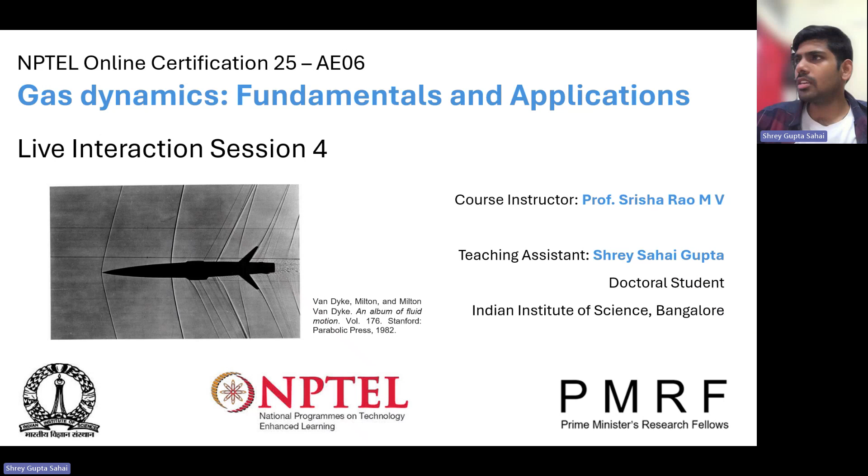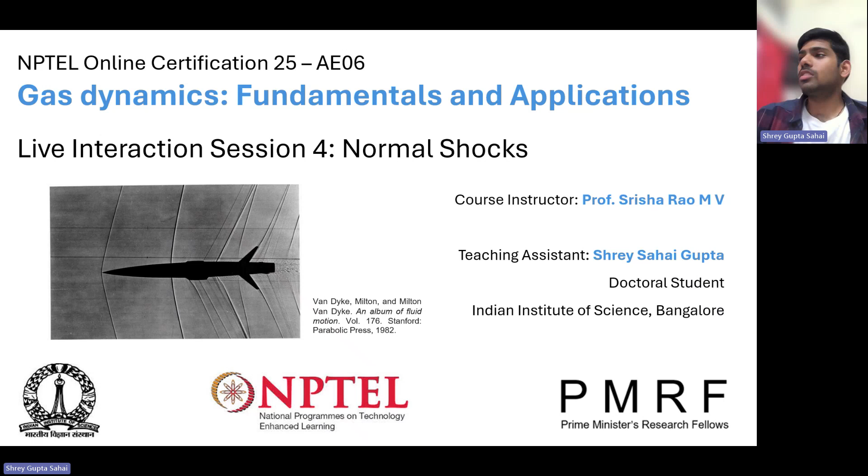The topic for today is going to be normal shocks, and we'll get started with it, for the benefit of people who have not watched the videos for the first three lectures.

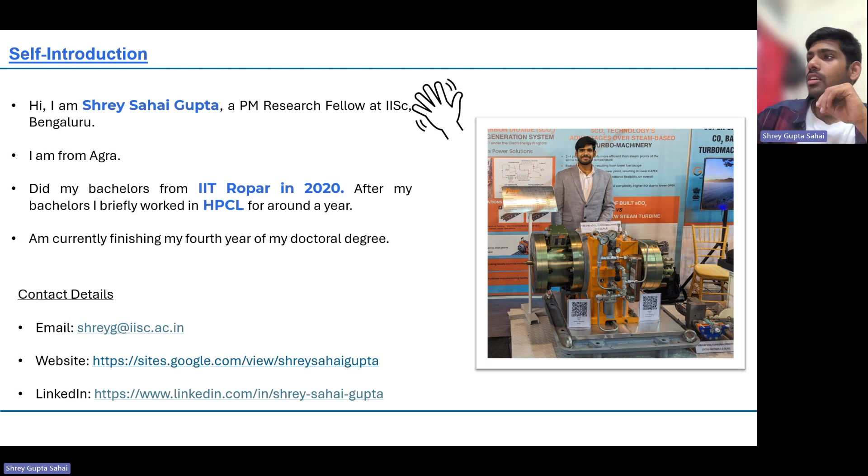Let's get started. A small recap from the previous lecture would be nice, so let's do that. Last time, we've had three lectures up till now.

The first lecture was just a brief overview. In the second lecture, we explored the fact that why high-speed flows imply compressible effects coming in.

In the second live interaction session, as we had nothing much related to gas dynamics as such, we started exploring the power of the integral form of governing equations when we want to calculate average quantities. For example, if we want a cumulative effect of something, we go ahead with our integral equations rather than solving differential equations. That is the idea.

A word of caution there: it's not the power of integral equations and the integral form of equations alone that allows you to simplify a very complicated problem and solve it very easily. There are a lot of simplifying assumptions that we take along the way to make progress. So that is one point.

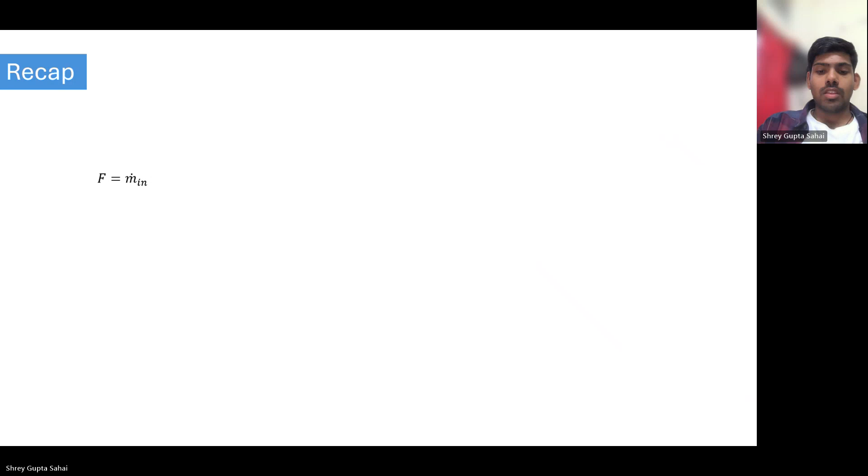Last time we looked at the thrust of a propulsion device, of a jet propulsion device, and we saw that the force is related like this, and there is an additional force term that comes in of this sort.

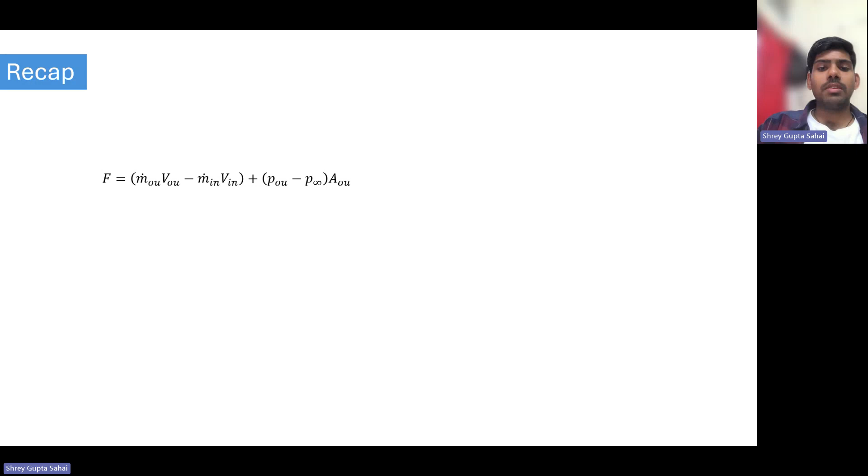Now, in this format, it might not give you the physical significance... oh, someone is joining, so let's.

Hello Pranav, hi, am I audible? Yes, yes. I guess I'm audible, let me know. Yes, yes sir, yeah, great.

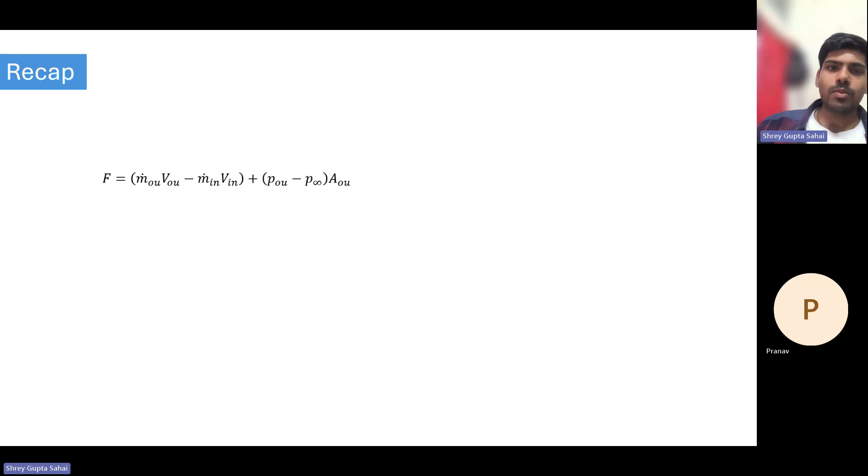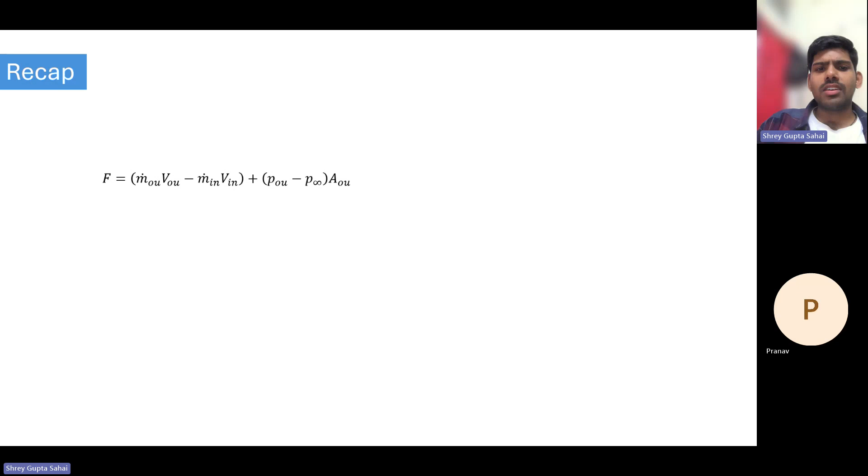I was just going through this recap where we derived the expression for the thrust force on the jet propulsion device. This is something that we saw, and in this form, as we had last discussed, I remember you were there in the last meeting, we discussed in this format. It does not give you a very physical significance of this expression, as there are some cancellations happening.

A more physical, a better expression which gives you a physical significance is the one where those cancellations do not happen, and you see that there's a force due to the pressure on the engine walls, a pressure force on the two walls of the engine, the inlet wall and the outlet wall, and there are side walls as well. That is something we had looked at last time.

We could have solved some problems, but that was all to just demonstrate that integral laws help you solve problems where you need to calculate cumulative effects, right? When you want to know the cumulative effects of something and not the detailed field or detailed variations of some quantity, you want cumulative details, go for the integral form of equations and start solving those equations.

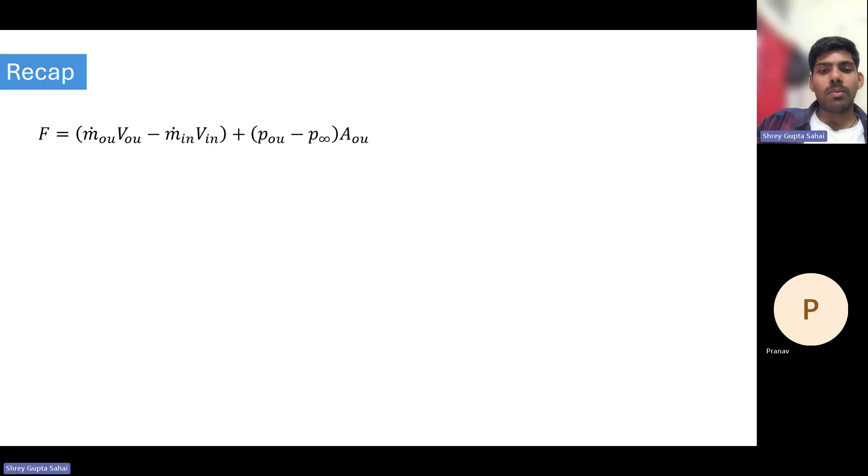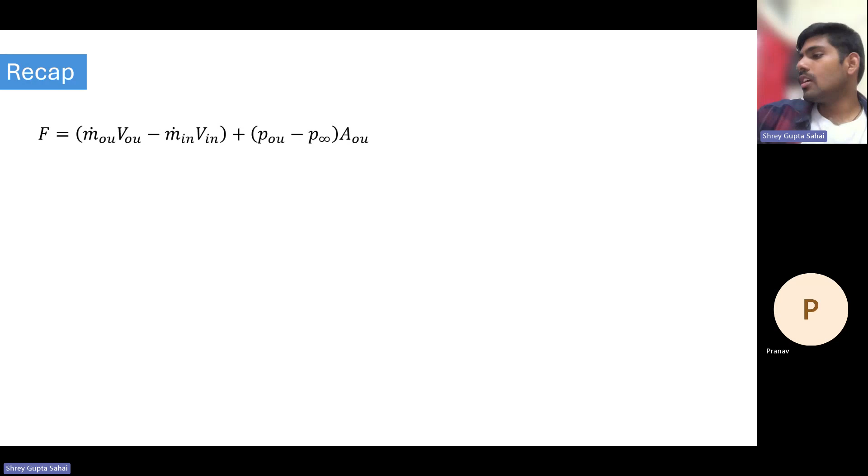Anyways, today we are going to do normal shocks, some problems on normal shocks, and we might as well just get started with it now that one of the students is present. I'll just write down the first problem, and then we'll go ahead and start looking at it. Maybe, Pranav, we can have a discussion on how we go and solve the problem we're going to discuss today. Before that, do you have any questions of your own you want to discuss?

No sir, nothing. Okay, so I have selected, I think, 2 or 3 problems today, I guess.

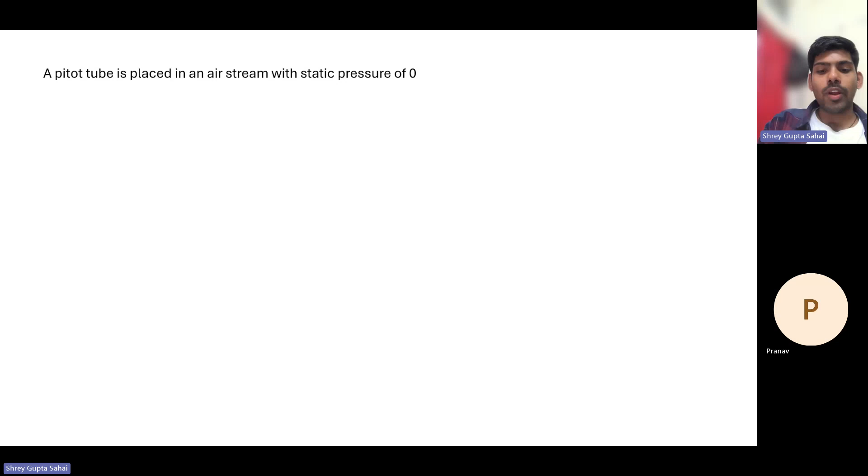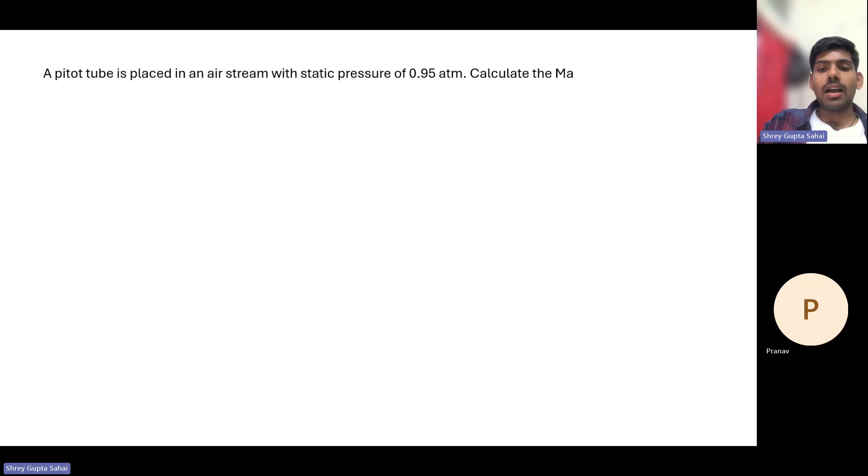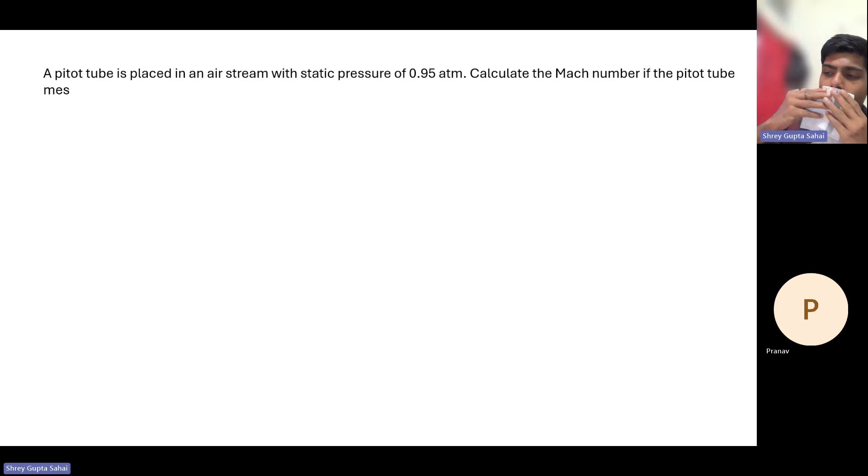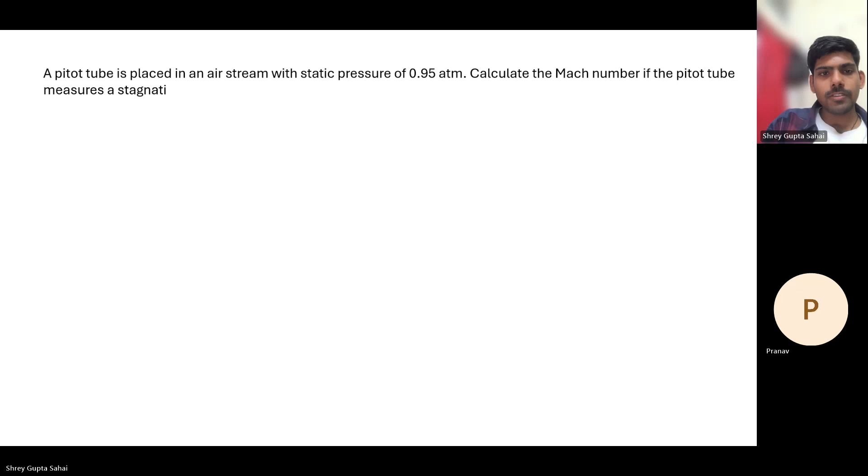I think you won't be able to see this. Okay, so a pitot tube is placed in an air stream with static pressure of 0.95 atmosphere. Calculate the Mach number if the pitot tube measures the stagnation pressure of: A) 1.1 atmosphere, B) 2.5 atmosphere, and C) 10 atmosphere.

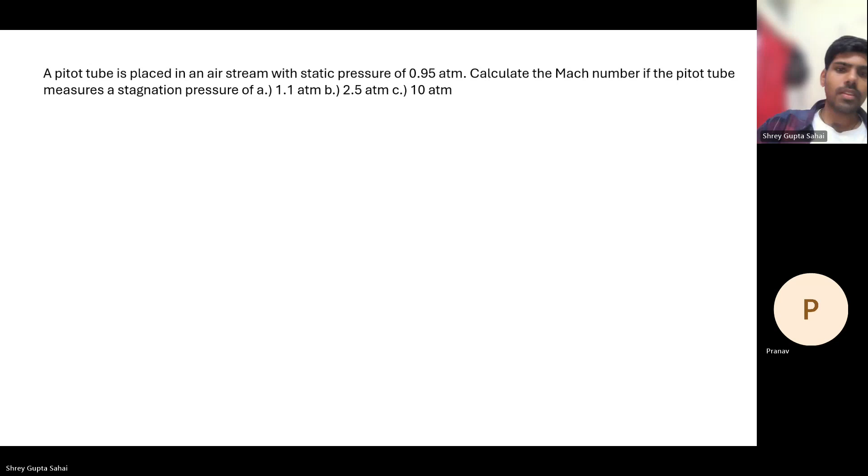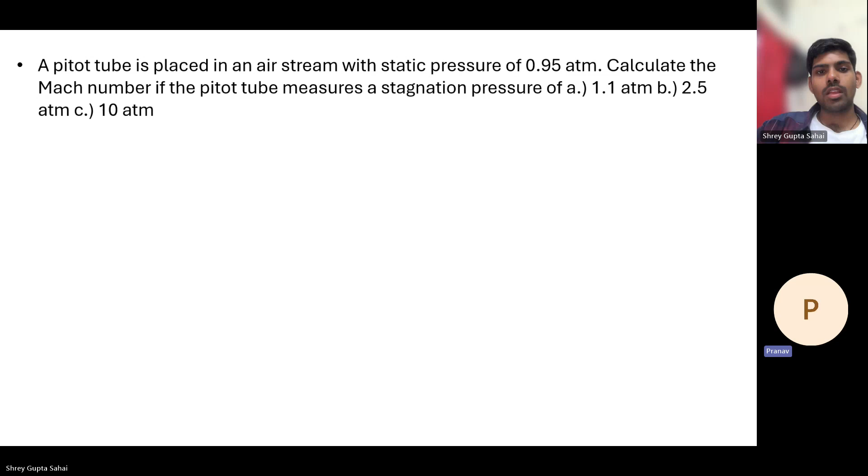Okay, have you read this question, Pranav? Are you able to read this question? Yes, yes, sir. Do you know how to solve it, or have you seen this problem before? I have a crude knowledge. I don't remember the actual formulas, but I know the concept that the pressures...

Wait, if it is a supersonic flow, for that we need to... I think we are actually calculating the pressure after the shock. So there is a shock just before the inlet of the pitot tube, and we calculate the pressure after the shock. So we need to calculate the pressure before the shock, and we need those ratios and all. So I don't remember.

You have gone through this problem, you know about this problem, good. And also we need to... So you're saying we need to... Great, okay, fine.

Now, just to motivate the solution, you upfront mentioned shock. Why do you think, why did you need to bring shock into the picture? Is there a reason for it? Like, how did you know? For example, does the fact that we are in a gas dynamics course suggest that there is going to be a shock somewhere, or is it very fundamental to any pitot tube problem?

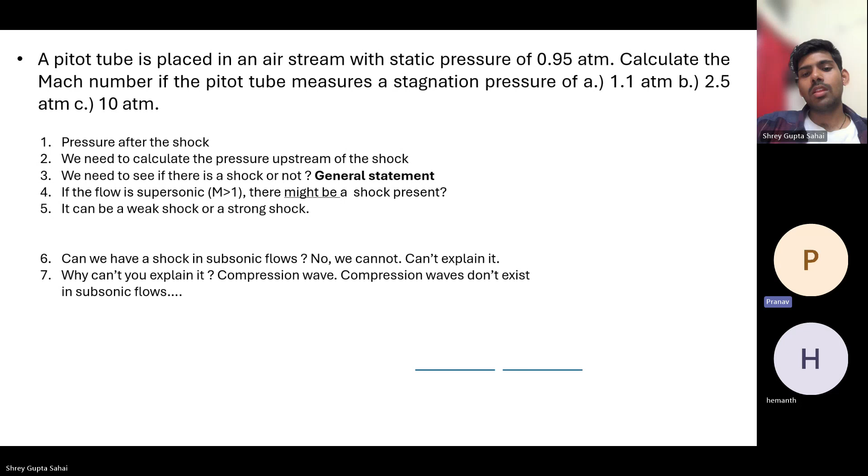I think it's because of the contour, the front contour of the pitot tube. The flow collides on the surface, and due to that there are waves which propagate in the opposite direction. So I think that's why, I think so.

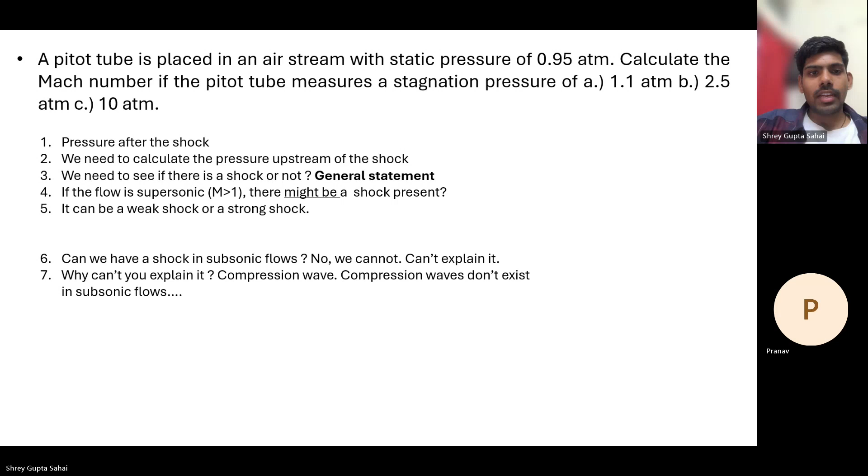Great, okay fine, let me try to answer it again. Let me see if I can draw how a pitot tube looks like. So, pitot tube - well, let me grab a picture from the internet and put it there rather than drawing it myself. Right, this is a good image. So what you said was more or less correct, but it's not fundamental.

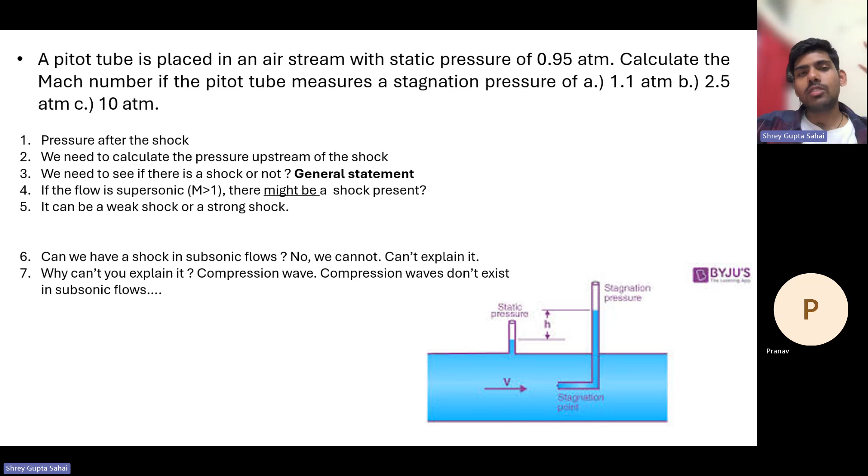Now I'll show you what is the fundamental reason why there will be a shock wave in supersonic flow with a pitot tube. The reason is that there is a stagnation point at the nose of the pitot tube.

Okay, I'll come here. So the thing is that you have a pressure tap where you are measuring the static pressure. Here the velocity is zero because this is going to be a wall. So suppose there is a plane.

Okay, let me - because right now the way we are talking, this image shows internal flow, right? The flow is internal in a pipe or something, which might confuse you because we have been dealing with only flows away from boundaries, away from walls. So it might confuse you as to why we are looking at flow in a pipe right now, but it does not matter that much. I'll show you.

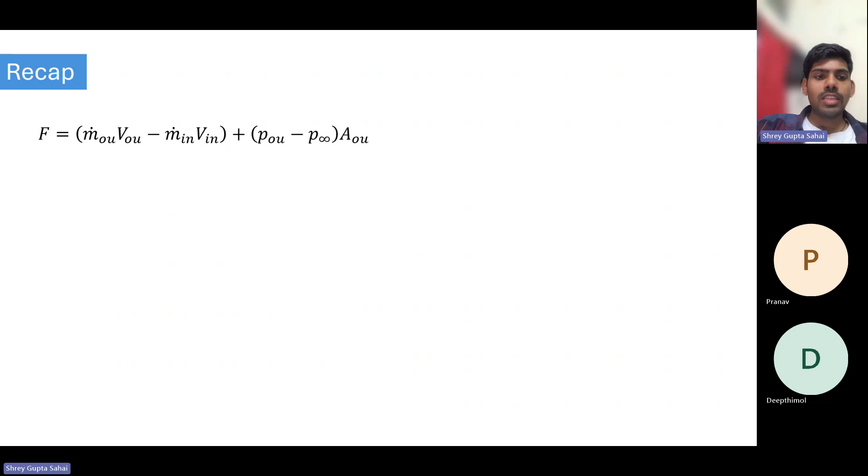Oh, what is this? Oh wait, yeah. Were you able to see that screen? Right, let me do that. So I'll draw it again here.

So I was saying, see, there will be some pressure taps on the wall of an aircraft or something. If there is going to be an external flow, even then there is going to be an object around which there is going to be a flow. So on the wall of that object, you can still measure the static pressure because on that wall, because of friction, the velocity is going to be still zero.

So it's not like in high speed flows at the wall there is going to be a slip or something, at least not in typical cases, not in cases of engineering relevance. That does not happen, and you can very well expect the velocity to be zero at the surface. And then you can measure the static pressure.

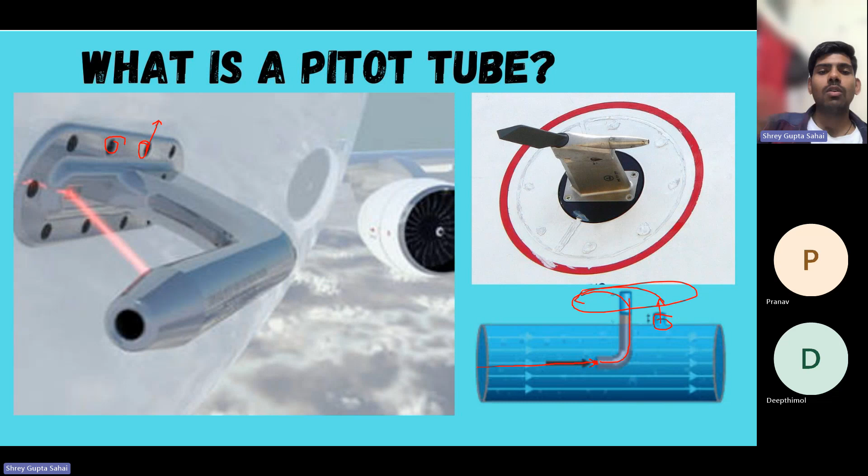And the pitot tube then measures the stagnation pressure also by means of isentropically bringing the fluid at its nose to rest. So this becomes a stagnation point, and there you measure the stagnation pressure, and then you subtract these two pressure values to get the dynamic pressure. That is how a pitot tube works, that is the logic of the pitot tube.

Now, in the attempt of stopping the flow to zero velocity, something that is happening at the boundary, naturally the flow there itself is of zero velocity. So that is static pressure, but there's a high speed flow incoming which gets decelerated to zero velocity at the nose of the pitot tube.

That is something Pranav was also talking about, that because of its shape, you're going to have some displacement of streamlines. Let me just draw this more nicely, otherwise it becomes flat.

Yeah, so something of this sort. So there will be symmetric streamlines, but there is going to be one streamline which is going to touch the body, the pitot tube. And as we have also looked at in ideal flows, right, the body of anything, any external body itself becomes a streamline. This is the zero velocity streamline.

Like in a sphere also, this itself becomes a streamline, right? And there is a stagnation point here, right? I don't know if you're able to recall this thing or not, but you can go and check about this.

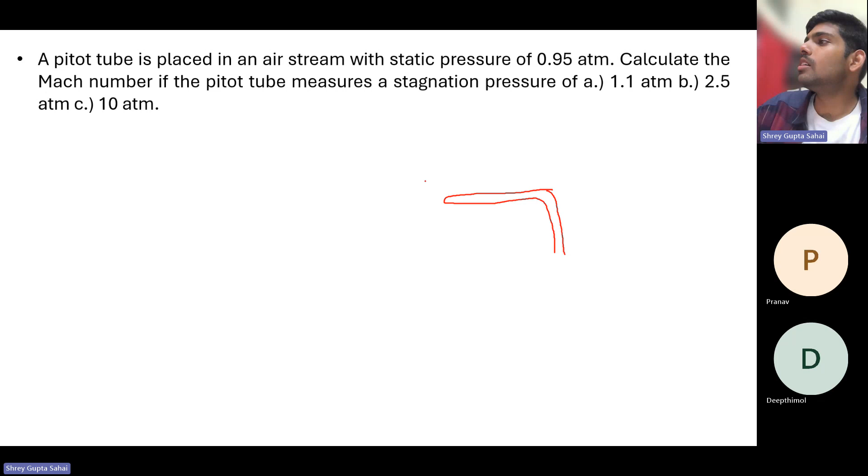Yeah right, so suppose this is the pitot tube. Please excuse my drawing. Right now I'm not going to say if there is a shock or not anywhere. I know that the pressure tap away from this pitot tube measured the static pressure to be 0.95 atmosphere. Now it says that if the pitot tube measures a stagnation pressure of 1.1 atmosphere, what is the Mach number? So now, can you guys tell me the general expression for the stagnation pressure and the static pressure?

Suppose, let's forget, and suppose if there is a shock, let me draw a shock with a dotted line, emphasizing that it might exist, it might not exist. As we have discussed, we are not sure if it is going to exist or not. We are going to see about that, we're going to figure out a way that there must be some way. So the point is, suppose there is going to be a shock there, okay?

There is a shock or not, or there is another way of developing an analytical formula where the existence of a shock or not does not affect the result. We'll see what I'm talking about. Basically, the same equation will give you the result despite the fact that there is a shock or not.

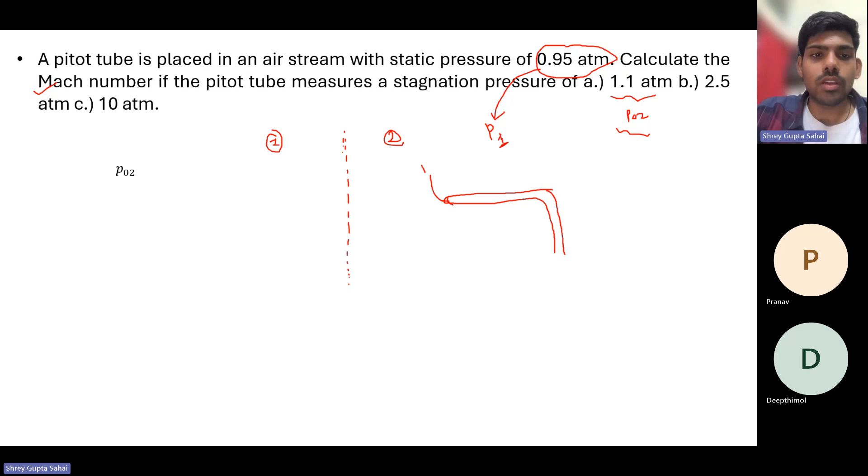Right, now let's break down this problem and look at the fact that if P naught 2 is known, can we at least go ahead and write an expression for P2, not P1, but P2, as a function of something? Do we know a formula for it?

Basically, static pressure from stagnation pressure. So P naught 2 would be P2 plus half rho V2 square. P naught 2 will be P2 plus half rho U square. Let me use U right now, rho U square, with U2 also there, and rho 2 also there. So this is what you're saying, right?

Interesting, okay, are you sure about this?

Sir, we can take the isentropic relation. Okay, please tell me how do we do that, and who is this? Would you like to tell me your name? I'm Deepthimol, from Kerala, in the district of Trivandrum. I'm a PhD scholar in the area of rocket propulsion. I couldn't attend the previous classes, so today I'm starting. I think it's good to interact with you. Great, amazing.

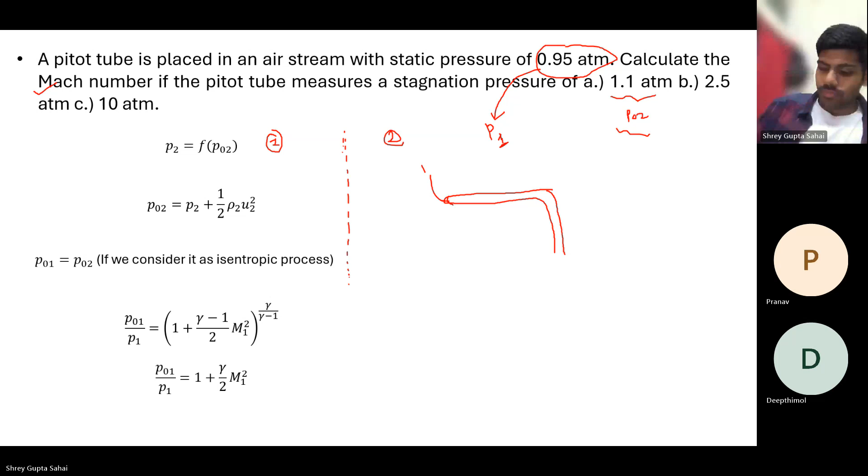Or do you think both expressions are actually equivalent if we go ahead and solve it? Let me ask you a question. Nobody wants to answer that. Should I go ahead and try to answer it myself? Yes sir, okay, yes please.

I guess Deepthi got this expression from the gas dynamics book or somewhere, like from the video lectures or something. Where did Pranav get his expression from?

I don't know, but I know that if the flow comes to a stagnation, the v becomes zero, that means the dynamic pressure gets converted to static pressure, and then we get the stagnation pressure. So now, summing up those values. That's interesting, there's a catch here - Bernoulli's equation also.

Okay, well in fact, I think she's correct. This comes from the Bernoulli equation itself. So, correct. Okay, great, very good Deepthi.

Now she says that this definition of static stagnation pressure comes from the Bernoulli equation. Now you tell me, have we used Bernoulli equation when we derived this? Have we used Bernoulli equation? Well, let me ask you this: what is the Bernoulli equation?

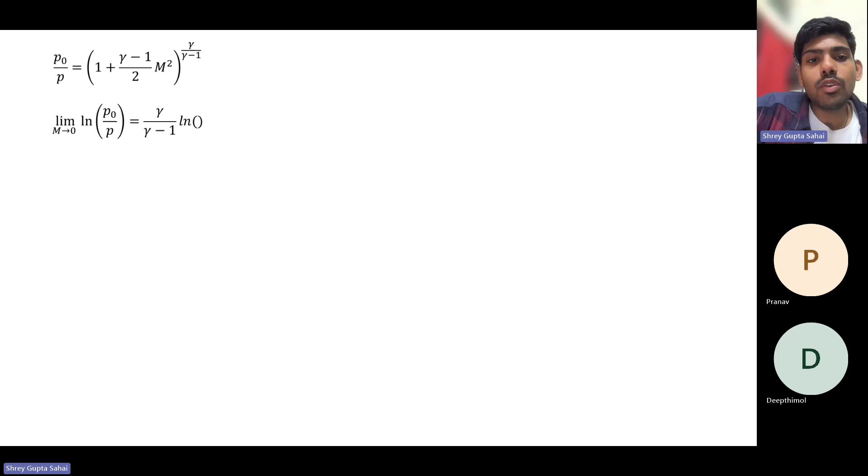So does anyone know, can we expand this ln term further? In the limit m square, or m goes to 0 or m square goes to 0, is the same thing, so it does not matter to us. You're still able to see the screen, right? Let me increase the font size a little bit.

So I'll tell you the expression: ln of 1 plus x is equals to x minus x square by 2 plus x cube by 3, and so on. Something of that sort. Just like that, we'll expand it.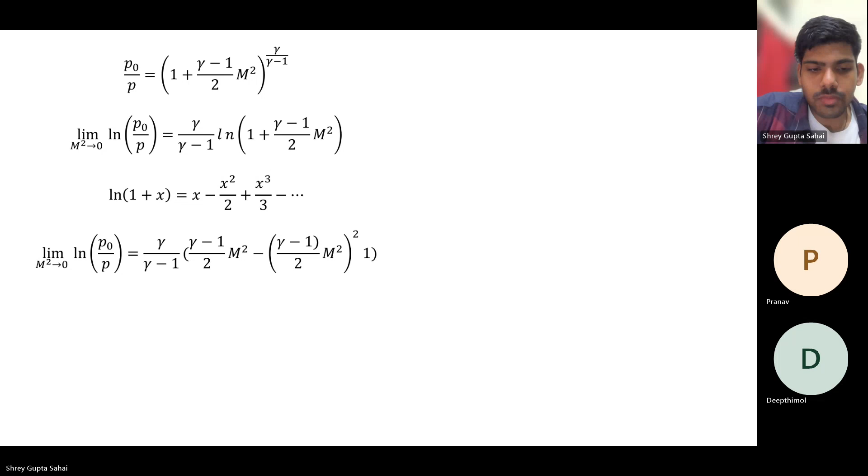And so on, I'm not writing the third term although I should. But anyways, you see some cancellation also happening, so let's go and do that. Now you can see it's simplifying, and as we discussed, we expect that the two expressions, in the limit, the first expression will converge to the second expression.

So taking this inside, you get gamma by 2, right? Get gamma here. That's it. Now, and so on, right? You get this, right? Wait, is there an issue or what? No, it's okay, yes, fine.

Now you see that this term is an order of magnitude lower than this term. This is the most dominant term in this series. Let's keep this term, let's not remove these terms. Or maybe let's remove these, let's not remove these terms. Let's see, there's a little bit more to be done here. But you can see something is gonna happen. Something is already happening here.

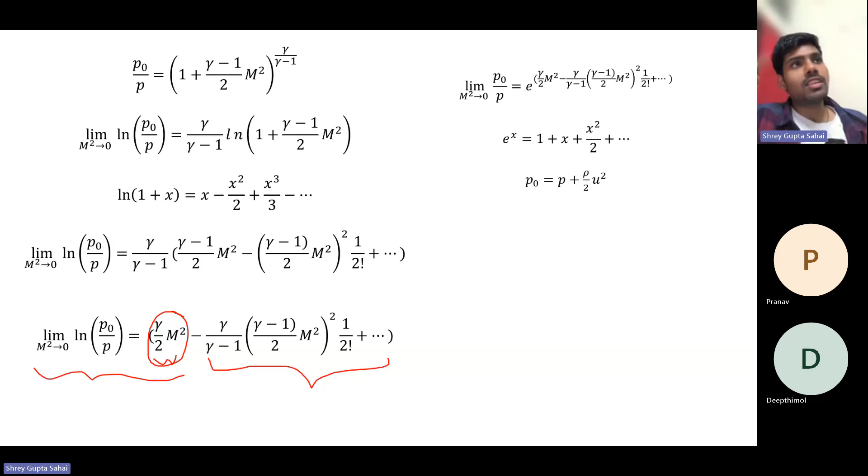That actually is coming from the fact that stagnation pressure requires you to isentropically decelerate the flow, and that is the actual definition. The definition that it is the sum of static pressure and dynamic pressure is a derived definition, not a general definition.

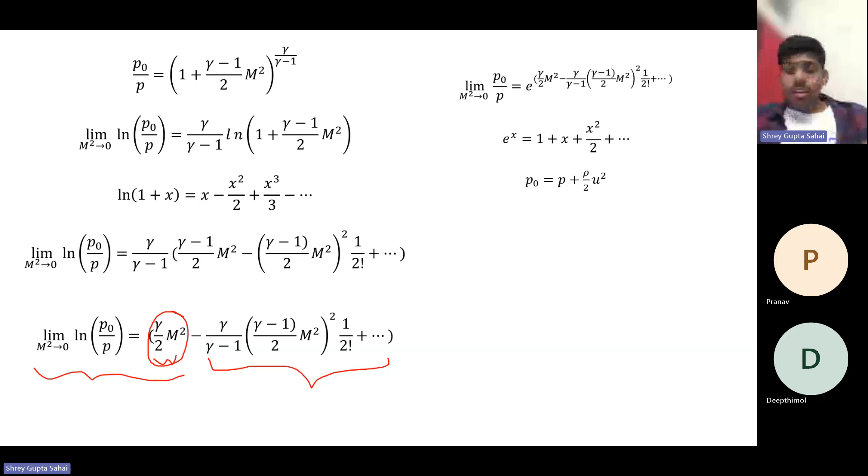Okay, understood. So where were we? Let's go back. This was a little digression. I wanted to just show you how this comes about. Now at least we know what the stagnation pressure and static pressure is.

Now, maybe you missed that discussion, that in supersonic flows you can get shocks in front of the pitot tube, upstream of the pitot tube. Do you know why? We had a discussion that in the case of supersonic flows, there might be a shock present upstream of the pitot tube. So are you comfortable with that statement?

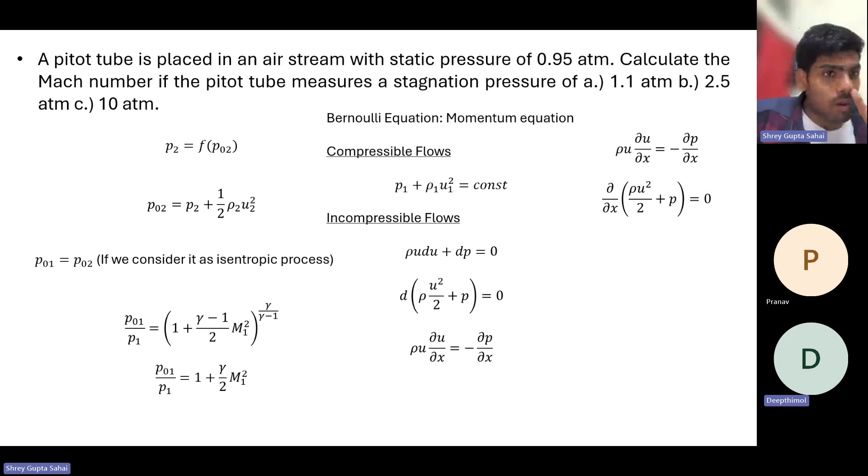Do you expect that to happen? Yes, sir. Okay, fine, so we'll move ahead. So now given that there can be a shock upstream of the pitot tube, now what do we do?

So in another interesting case of supersonic condition, sir, can I say there is another equation, the Rayleigh-Pitot static tube equation. So in case of supersonic conditions, I think we take that equation instead of this one.

But what is that equation? How is that equation derived? What is the logic of that equation? Where is that equation coming from? I'm not asking you to tell me the equation, I'm asking where it is coming from.

I had studied somewhere that in case of supersonic flow, we can't use this equation instead, so we can't predict whether it is the total pressure. Okay, so there is a better way, I guess. But I've not gone through it, maybe I can do that too. I think there is only one way, it's just that I don't know the name of it.

Anyways, one more important thing is, how do you calculate Mach number downstream of a normal shock? Let's say, Pranav, you tell me. We solve for three equations, right? Rho 1 u1...

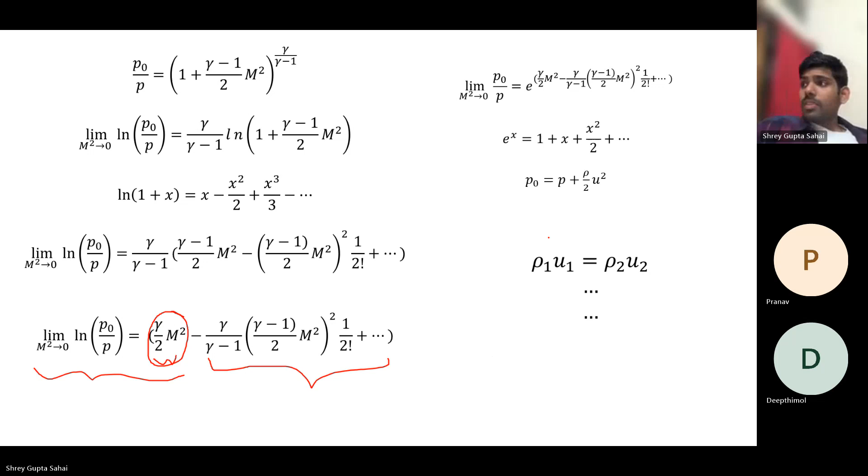Sir, are you not seeing the screen, are you writing anything? Sorry, I just noticed. So when we are solving for M1 and M2, like Mach number before the shock and after the shock, how do we solve for it? These are the three equations we use: momentum equation, mass equation, and energy equation. I'm not writing all three of them.

So the result, what do we get? We get M2 as a function of M1, right? And generally we have a table out of it. What is the trivial solution of this function? Think about it. The question is, what is the trivial solution to this function?

No, nobody can think of anything. Do you know what a trivial solution is? Which is straightforward, we can just, without solving anything, straightforwardly say this can be one solution to these three equations. These are the three equations. Can you tell me the most trivial solution to this problem?

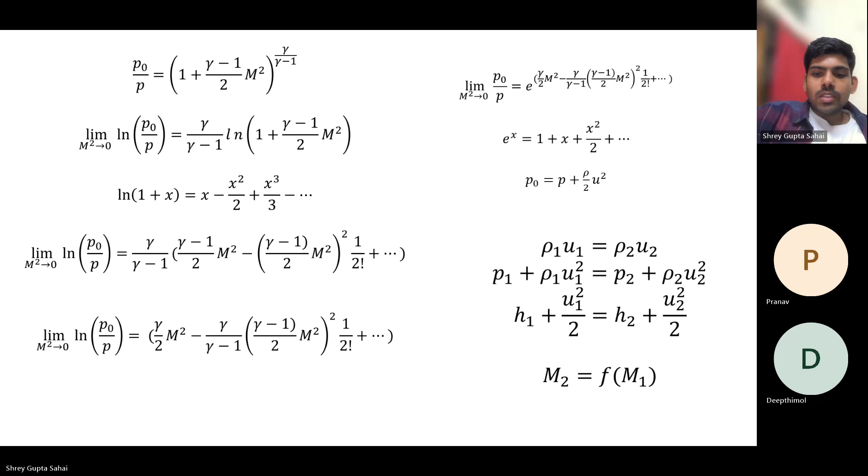So let's assume that we have a shock. Wait, no, next slide. So assume we have a shock, and by assuming that we have a shock, it is also possible to not have a shock because M2 equals to M1 is also a trivial solution to this normal shock.

Okay, and we know P naught 2, we know P1. Now we need to find M1. That's it, that is straightforward, that is what we need to do. Okay, so first of all, how will we do that?

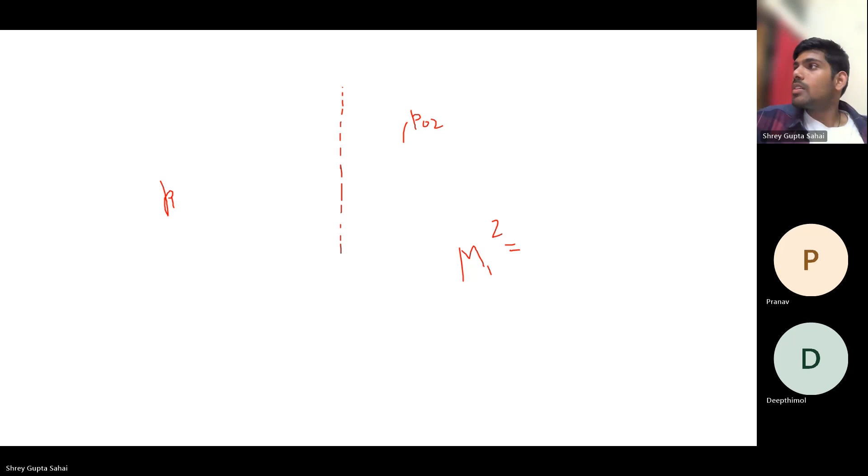We're gonna use the same expression that we wrote just before earlier. Let me just write that. Okay, so because we know P naught 2, I'm gonna use this expression.

And now in the case that there is a shock, then we are gonna write P1 by P2. That is our strategy. Now once this is done, there's an expression for this - I guess one of you can tell me. We multiply these two - what do you say?

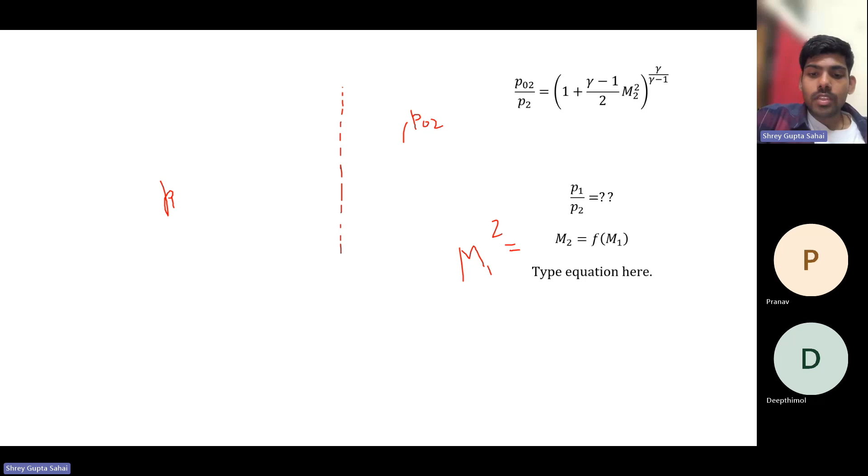Okay, one more thing is there is also an expression for M2 in terms of M1, again that comes from the normal shock relations. You multiply these two ratios, you get P naught 2 divided by P1. So you do it smartly, you cancel out P2. That is what you want to do.

Which is gonna be P naught 2 by P2 times P2 by P1. Okay, now what? And this comes to be an expression as a function of M1, right? Do you agree?

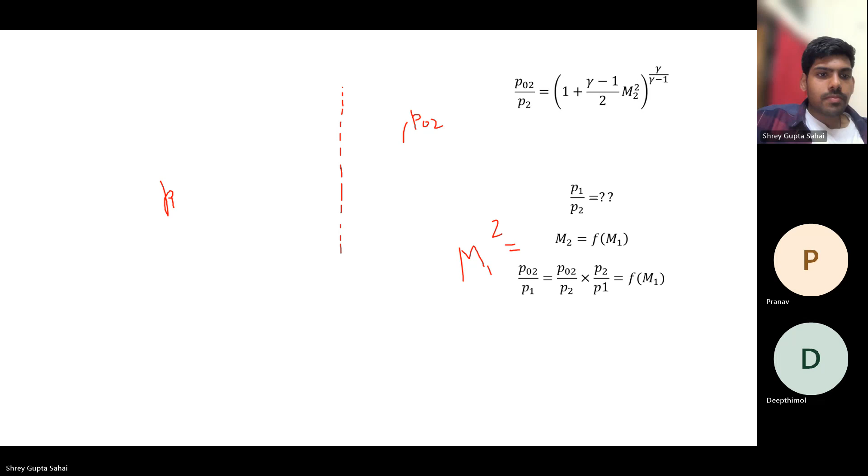Yes, the plan is to substitute. So first of all find this whatever - okay, let me change this to be G. So find this G, plot it, because this is an implicit equation or transcendental equation.

This is well, it's not transcendental, that's an implicit equation. It's not like we are getting M1 as a function of P naught 2 by P1. It's an implicit equation, so we can solve it graphically. So we're gonna do it graphically.

Okay, so now the plan is, now that we know P naught by P1 and we know P naught 2's, we're going to calculate these ratios, see for what M1 these values are gonna come, where the intersection is gonna happen. So now maybe Deepthi, do you have access to normal shock wave relations or not? If not, then I can just look them up.

Maybe I'll look them up. Yes sir, I have them. Wait, you have? Great. So go ahead and tell me, what is P1 by P2? Or P2 by P1 - that is actually better.

P2 by P1 is equal to 1 plus 2 gamma by gamma plus 1, into M1 square minus 1. Great. Do you also have an expression for M2 as a function of M1?

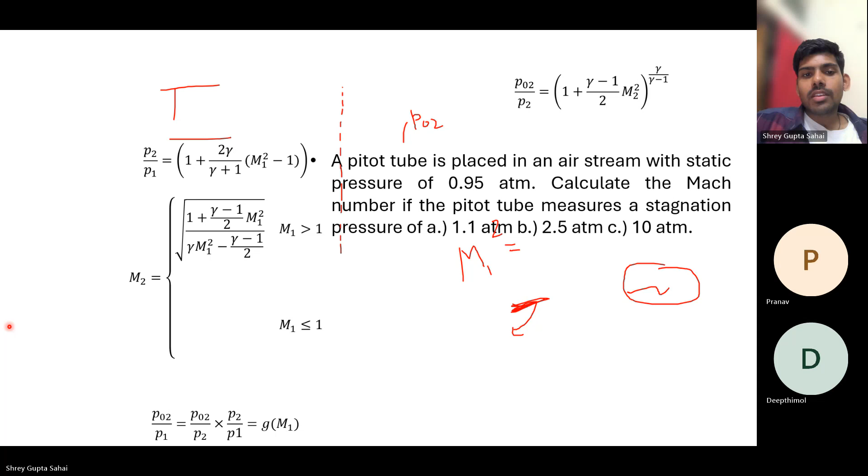Less than or equal to 1 means we can't take the normal shock relation, right? Right, but then what happens? What is M2 equal to? I'll tell you, I'll tell you. It's simply M1. So simply M1, right? Because there is no shock, so Mach number is not gonna change. Is that okay? Yes.

Right? So we are gonna use this expression, this function, rather than simply putting that formula, which is totally correct. This is totally right, this is how you do it. Okay, I'll show it to you now.

Wait, so the way we do it, this is a website I have used a lot of times, for graphical purposes. It's very nice. See how I write it: I have written M2 as a function of this, same thing, G is the gamma here. See, 1.4 for air I have taken.

When it's between 0 and 1, you simply put it as x. X is the M1, so x is the x-axis here. You're gonna plot this function as f of x. Okay, x is M1 and y is f of x, G of x actually, we had written g of m1.

So in the limit, in the case when M1 is equal to or greater than 1, this expression we are going to use, and this is how it looks like. So in the limit, if we had taken only this thing, this was the erroneous part. If we had not included this, let me show you how this would look.

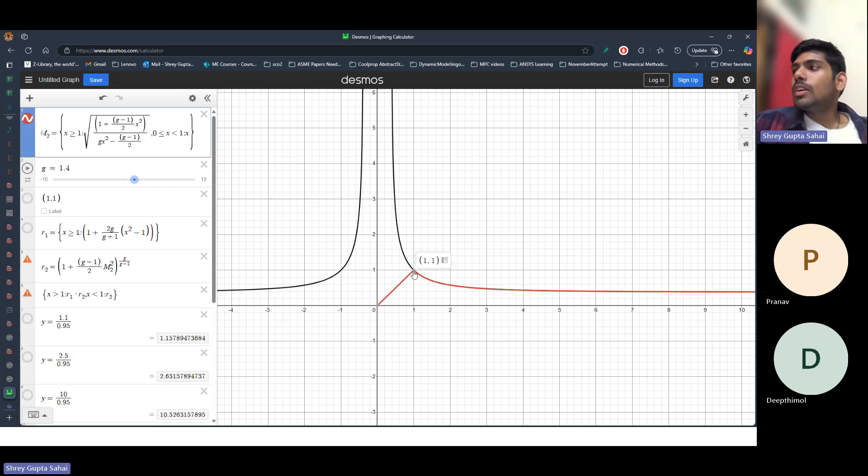See, it would look like this. But we know that below M1 equals to 1, this is all erroneous, it does not make sense, right? At least right now we know that. So instead, we do it this way, this is right, fine. Now this is all okay.

We move ahead. See, this curve will also meet at 1 comma 1. So at Mach 1, the downstream Mach number is also 1. Now the two ratios, I think this is P2 by P1, and this is the overall thing, the G of X, G of M1.

Now you can see my screen, right? You can see all this Desmos web page and all. Yes, so this is case A, where the stagnation pressure was 1.1 atmosphere and 0.95, you find a Mach number of 0.46. So case A was a subsonic case, you see 0.46 is the Mach number you're getting.

If it was case B, 2.5, you'll get a Mach number higher than 1 because the pressure ratio is 2.63. Earlier the pressure ratio was only 1.15, so you could expect it to be subsonic. But now the pressure ratio is increasing beyond 2, and the corresponding Mach number is 1.27.

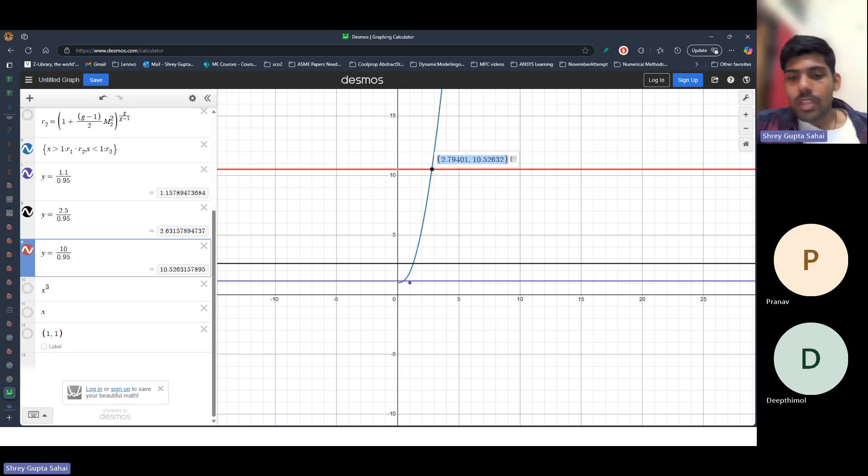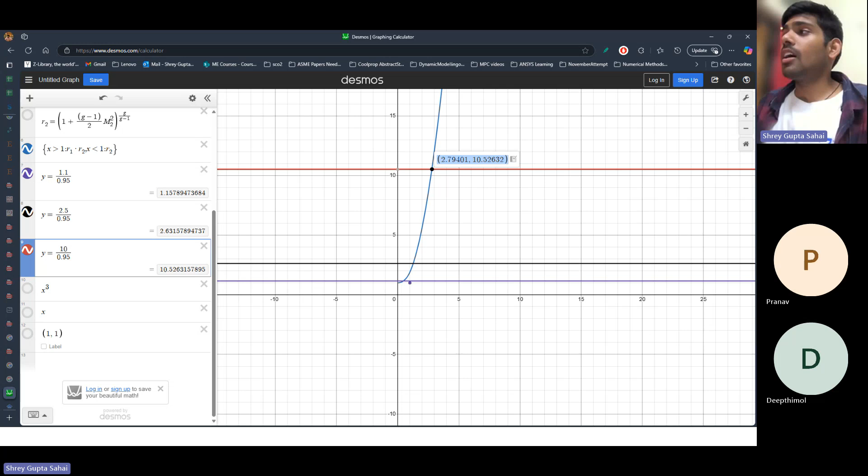Okay. What else did I need to tell you? That's it. Okay, something you can do is see how much error you would get in calculation of

the Mach number if you forget all this and just simply use p plus rho u square by 2, or you forget, or you use... Let me get back to the slides. So without doing all this, this is something you can try to just get a feel of what is going on, or how much error you might be dealing with if you just don't take care of things.

Consider if you take two scenarios: in one you use this equation simply, and in the other you use this equation again simply, and solve for the Mach numbers. So what will happen in this case, what do you think? What will happen, guys? Want to discuss that?

Are you going to get any error when the flow is subsonic with these two formulas? There is no shock in case A, no normal shock in this case, so this will give you the accurate result, isn't it? So this one will be okay.

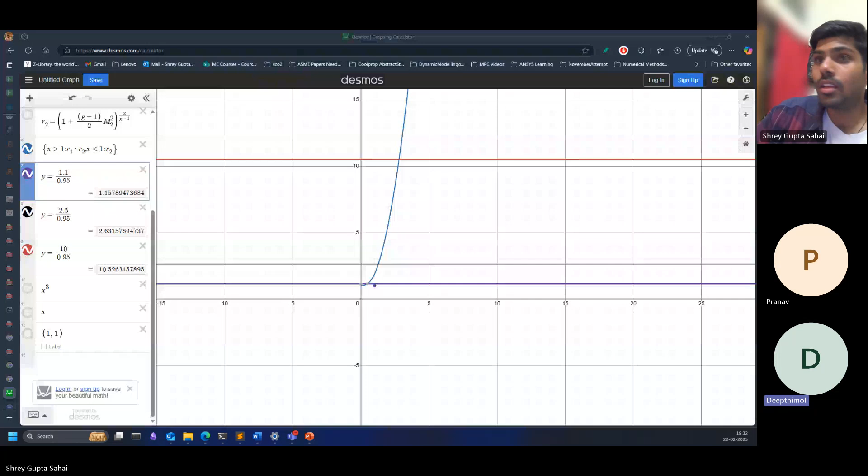I am confused, sir. In supersonic condition, shock is formed whenever there is a sudden change in the flow properties. In subsonic condition it's maybe not associated with such changes. What changes are there in supersonic flow? There will be a sudden change in pressure and temperature.

But okay, very interesting. Why do normal shocks form in the first place? Suppose there is a supersonic flow flowing, a supersonic stream going through the atmosphere. Will it always form a normal shock? Why? When does a normal shock occur? How does it come into origin? What is the genesis of a normal shock?

So it's in a supersonic condition; we can't say for certain either it is a normal shock or it may form an oblique shock also, based upon the object shape. Based upon the object we can say either it is normal. I'm not sure. But does it always have to be an object? For example, if there is an object, does it mean there is going to be a shock there?

So in presence of an object in a supersonic flow, there is going to be a shock. That is what you're saying. I guess you're correct, I don't know if you're making a wrong statement, I think you're making a correct statement. But what is it about that body or object that is giving birth to shocks? What is it?

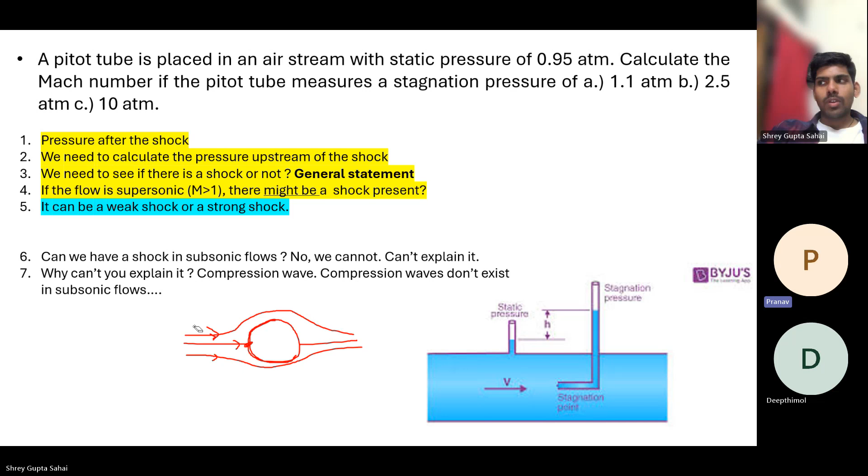It comes to a stagnation, so around or on the surface, the flow gets obstructed, and it forms something like a wall. It decelerates so much that the flow coming just before that gets decelerated due to the flow downstream. That's how a chain occurs, and we get a normal shock, and there is an equilibrium. In this equilibrium state we get a stationary normal shock.

I don't think I'm able to put it into words, what I'm imagining. No, you did it very well, you did it very well. Your intuition is quite correct. There are a couple of things I think you might already know as well. But possibly, let me try to articulate what you are saying.

There are a few things that if you think about, will make more sense. The first thing is you're gonna soon read about traveling shocks, moving shocks. There you will realize that shocks are supposed to move. Shocks do not just simply stand anywhere, they are not stationary as such, not inherently stationary. The reason we study stationary shocks is that they are the simplest to introduce. The reason they remain stationary, standing somewhere, is that the flow upstream is supersonic, at such a high velocity that the shock cannot move upstream.

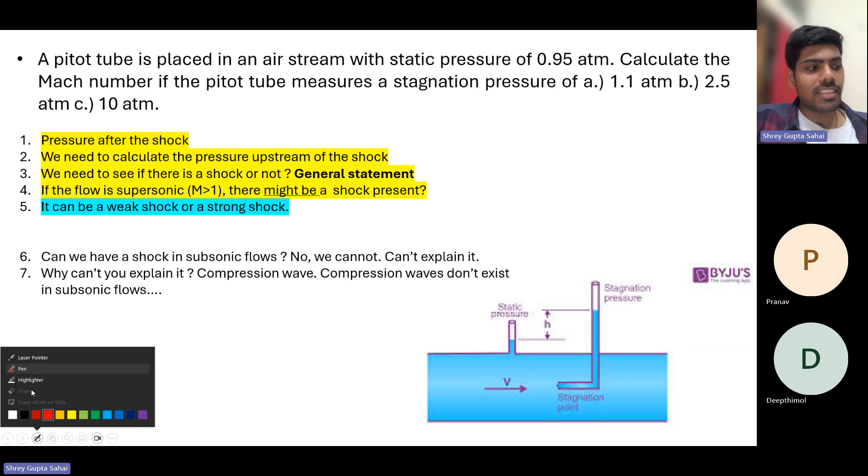Does entropy not decrease in thermodynamics? When I say that entropy is decreasing and that is violating the second law, am I making sense? Does entropy never decrease only in thermodynamics? And does it always violate the second law whenever entropy decreases? What do you think?

Yes, entropy never decreases, is it? Based upon some assumptions, we can say it never decreases - based upon considering the flow as ideal, flow is isentropic. Okay, flow is isentropic.

But normal shock is also so what is normal shock? Is normal shock isentropic? No, it is not. Normal shock is not isentropic, right?

Hello, guys, am I still audible and is the connection fine? Yes, sir. So I was just saying, Pranav said that normal shock is not isentropic. So is the entropy increasing there or decreasing? Increasing. It increases. The fact that in subsonic flows a normal shock would imply that entropy decreases.

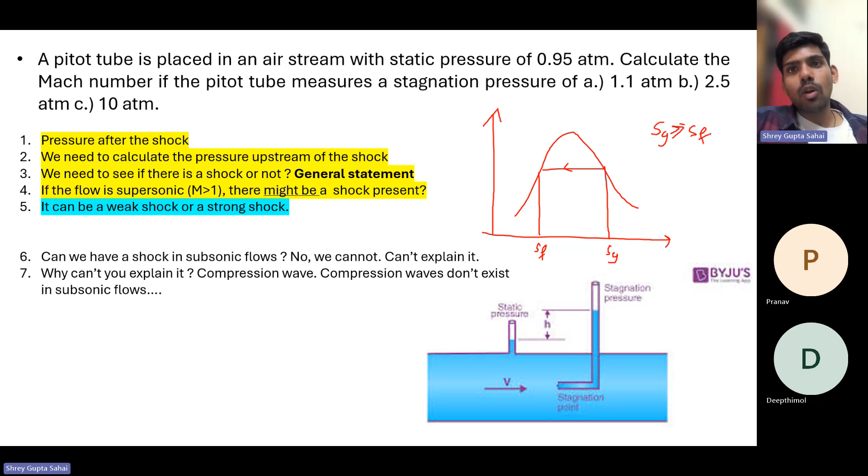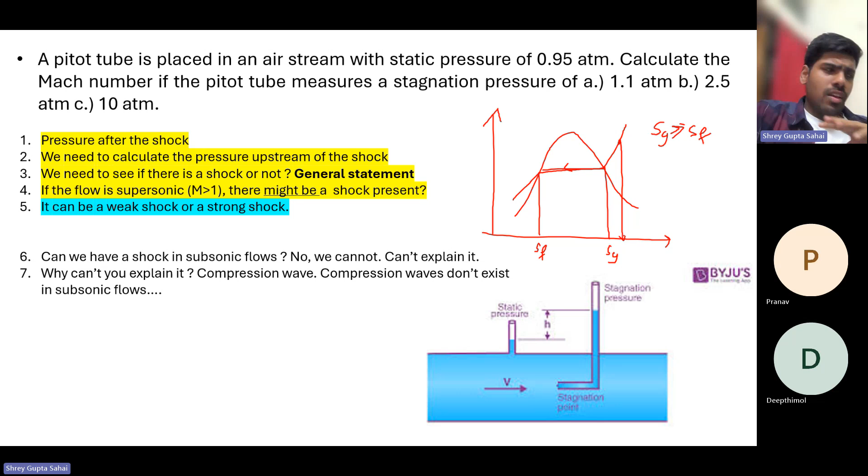There is one more way, and that way is to remove mass from it. Suppose there is some tanker, some volume is there - you remove some mass from it. You know that mass has some entropy, right? Suppose we are on an isobar - it has a specific entropy. Some mass will have entropy with it. If you remove mass, that much amount of entropy, multiplied by the mass you have removed, will get removed from the system. That is what the second law says - there are only two mechanisms of how entropy can be decreased. I'm not talking about increasing - there are multiple ways of increasing it. Decreasing it, there are only two ways: either you cool it down, or you remove mass from it.

That is why when we say second law, we say isolated system. Both of these things can't happen because energy cannot be exchanged, mass cannot be removed, and that is why we know entropy is only gonna either increase or remain the same.

When does it increase? Without exchanging mass or energy, you can't even increase the entropy by any reversible method. To increase the entropy in that case, you have to have some irreversibility in the system. So that is also something the second law talks about.

So here the catch I was trying to play was that obviously there is no mass exchange or mass removal. This is a steady flow process, right? When we talk about a normal shock, it's a steady flow process. So there is no discussion on mass removal, it's only heat addition or heat removal.

And we see that across a normal shock, it's an adiabatic process. There is no heat exchange there. There is no work exchange also. So there is no work exchange and no heat exchange.

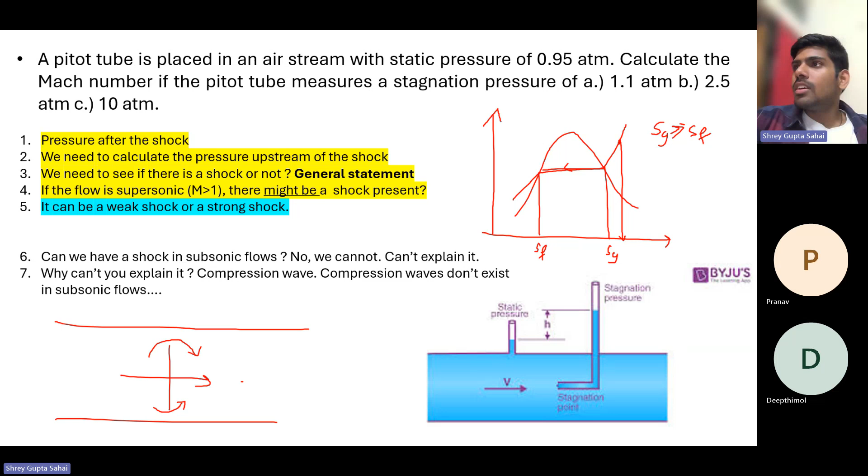So what you can do is, I guess you can't copy the links, that's your issue, isn't it? So what you do is go to inspect. Let me show it to you. Wait, let me do that. Let me see, you can do that. I think this is the one there.

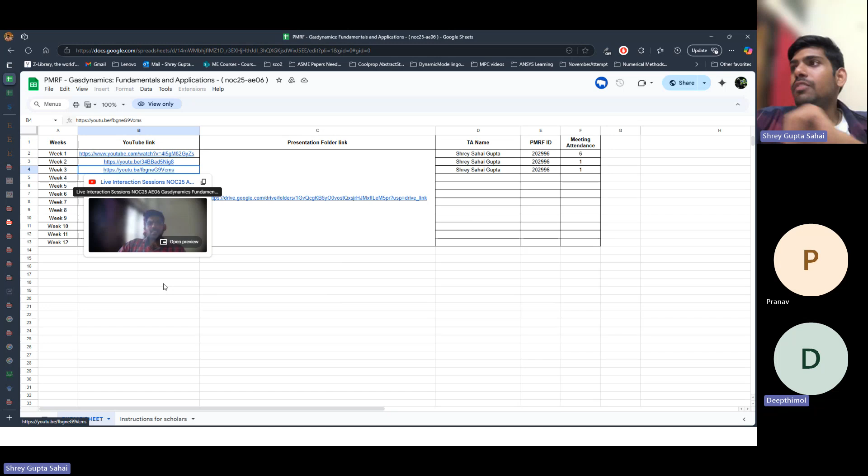You can open it, I guess. Even if you can't open it, what you do is you go to this inspect option. This somewhere it will be, inspect page, here, no tools. Do you see inspect somewhere?

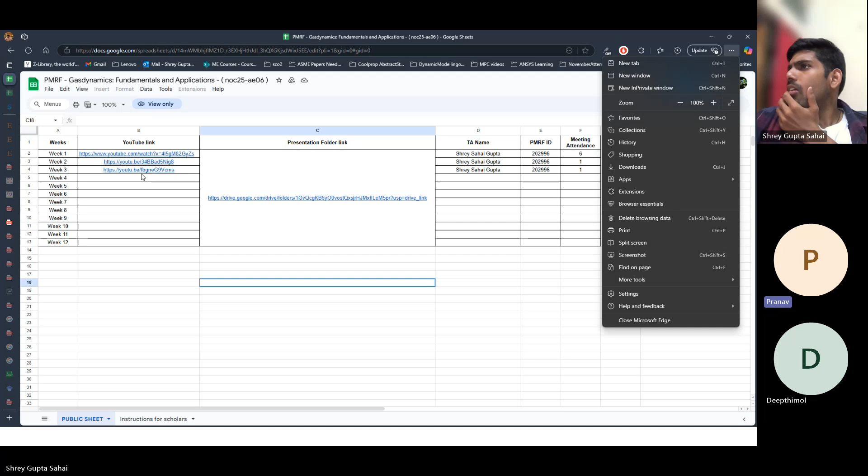You can just press F12. If you're on a laptop, then you could just press Fn and then F12, because you may have... So Fn plus F12. Where is Fn? Bottom left. Great.

Okay, so this inspect you do, and now otherwise you can access this thing. I think there is a copy button also in that pop-up. Yeah, I think this is the one you guys can access. There's a copy also, is it? Yeah, you can copy also, there is a copy button in that pop-up.

Okay, so hover over there, on the bottom, sorry, top right corner of that. Okay, got it, got it, this one. I will check, sir.